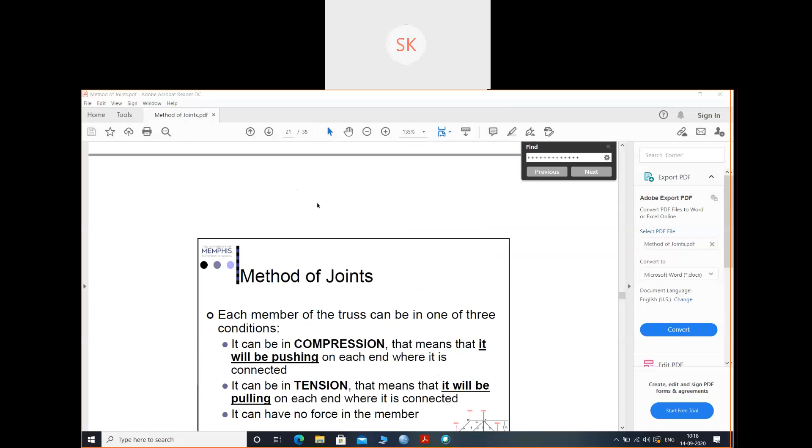Hello, alright. I hope this part is clear to you. This part is clear to you, right? This is the method of how we have found out this 500 and 700.

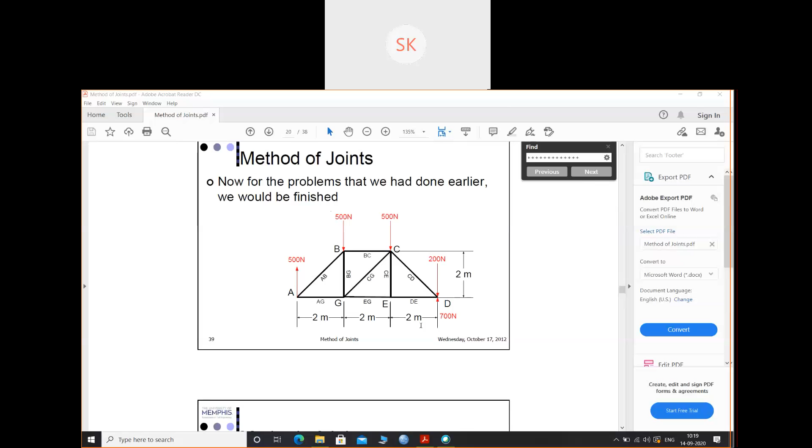Now let's move to analysis of the members. I am at screen 41, page 41. So, method of joints. Each member of the truss can be in one of three conditions.

It can be in compression, that means it will be pushing on each end where it is connected. So either your member will be in compression or it is in tension. There will be three conditions: sometimes your member will be in compression, pushing on each end where connected, or it will be in tension, pulling on each end where connected.

I have drawn a yellow line. Let me change the color. I have drawn a red line. It is visible. Please respond, a red line is visible.

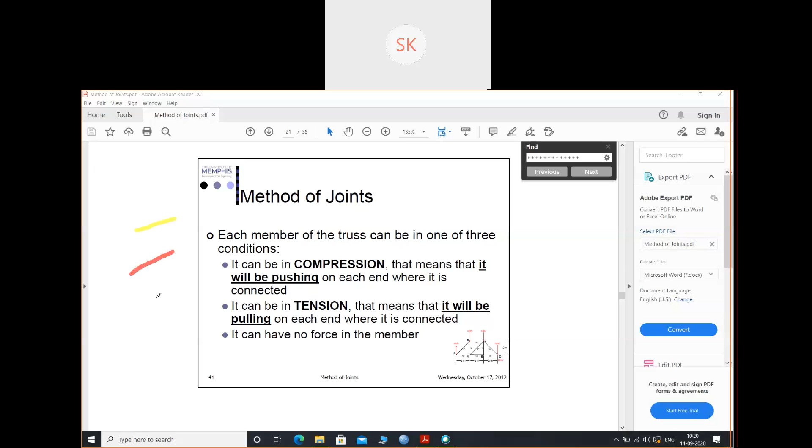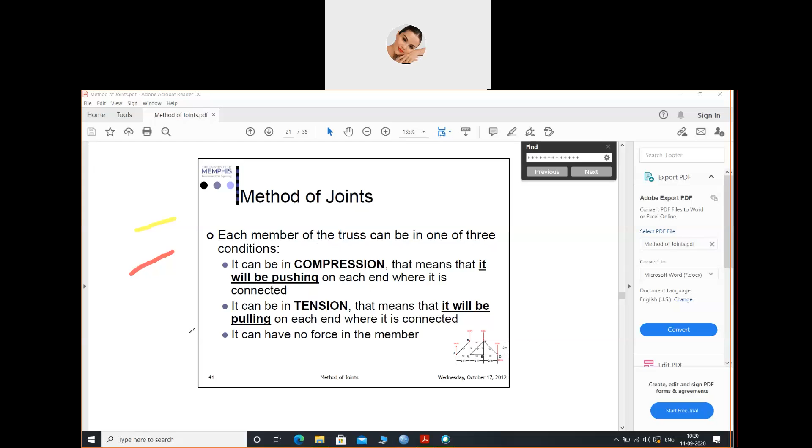This is one joint A, this is one joint B. So either this will be in tension or this will be in compression, or it can have no force in the member. Understood? So your member will be in three conditions: compression, tension, or it will have no force in the member.

In the method of joints, we are going to assume the condition, only yellow and red line is visible. Yes, I have used yellow and red. Okay.

Next, understood or not: your member either will be in compression or in tension, or it will have zero force. We have discussed zero force member earlier, right? Again, zero force member means that member will not carry any force.

So the member which does not carry any force is considered a zero force member. So you have to consider that the members are in compression or in tension, and if after solving you find a member is carrying zero force, it will be a zero force member.

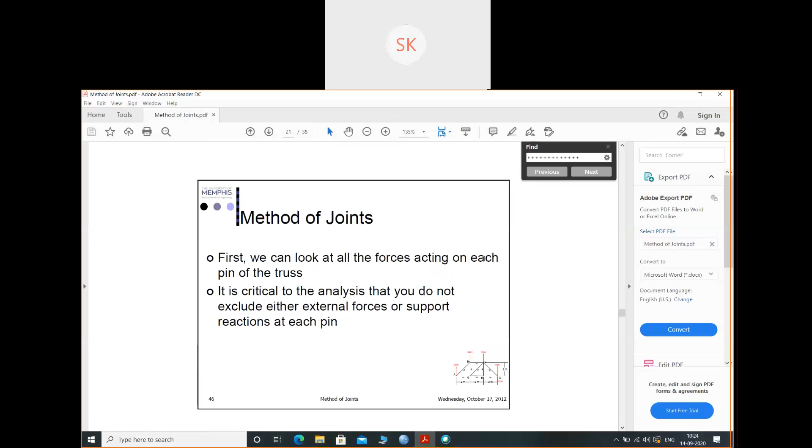First, we can look at all the forces acting on each pin of the truss, at every pin. That means at every joint A, B, C, we'll analyze what forces are acting. It is critical to the analysis that you do not exclude either external forces or support reactions at each pin. If you do not consider all the forces, then you'll get wrong answers.

If a member is pushing on a pin at one end, it is always pushing on the pin at its other end. Consider member AB: if it's pushing here, this member is in compression, so at this point it will also be in compression. It cannot happen that at one point it is in tension and at another point in compression.

Method of joints. Conversely, if a member is pulling at a point, the same logic applies.

At one important point, at any joint, you can only solve for two unknowns. Suppose the screen is visible, 49 screen. Screen is visible. Please respond. I'm at 49 screens. 41. 41. Why in 46? Wait, it will come to 49. No, it came now, ma'am.

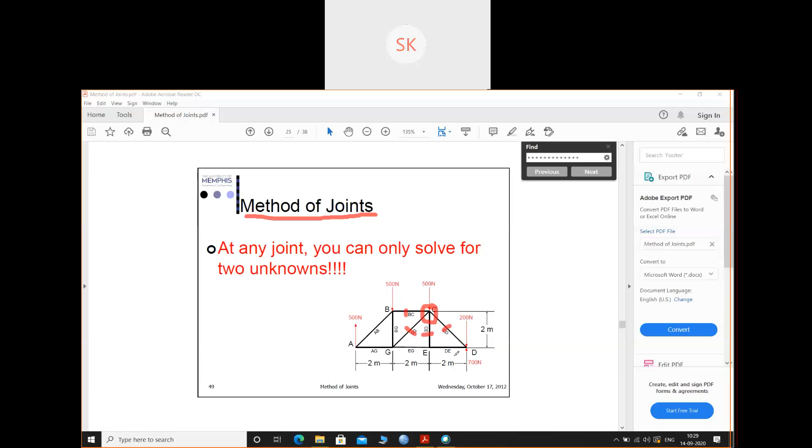Suppose take the example of joint A. At this joint, you have unknowns AB and AG. You have one known point, which is 500. So by this, you can find these two values. So joint A has two unknowns, AB and AG, and joint D has two unknowns, CD and DE. Understood? Joint A has AB and AG, and joint D has CD and DE. So you have to start with joint A or D. Once you solve for A, you will get the AB and AG values, right?

Then next move to either B or G; you will have the option of either B or G. At B, you know the AB value now, so how many unknowns do you have? BG and BC, so you can solve this. But if you go to G, here there are four members. When you solve A, you know only AG, but next you have to find three unknowns: BG, CG, and EG. So it will be difficult for you.

So while solving, you should know you have to solve for two unknowns. Got it? Now is it clear? His response: now it's clear. Please respond. Yes, ma'am. What about others?

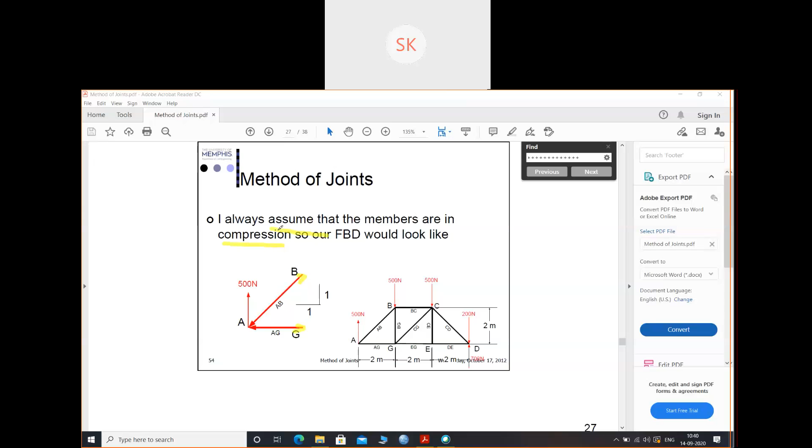Okay, I have assumed that members are in compression. So the direction of the members are towards the joint. Let me note, change the color to red.

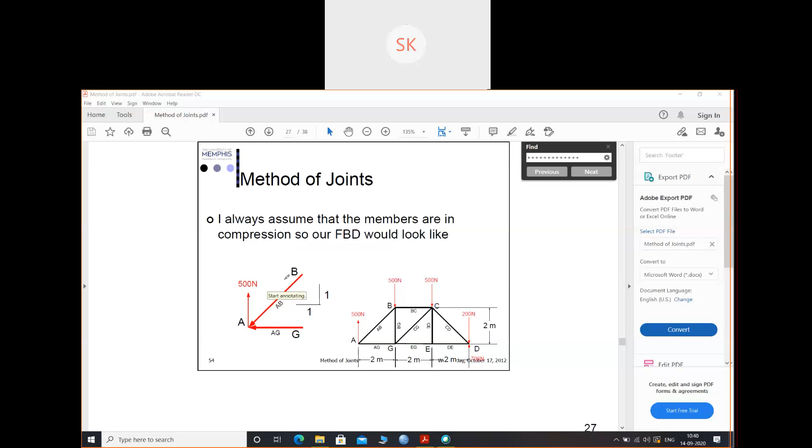So this is the free body diagram. Two forces are acting, one is AB, another is AG, and I have considered that these members are in compression. One force is already acting, which is 500. So this is the free body diagram. Now you have to analyze it.

Since I assume compression, the force in the members are pushing on the connection.

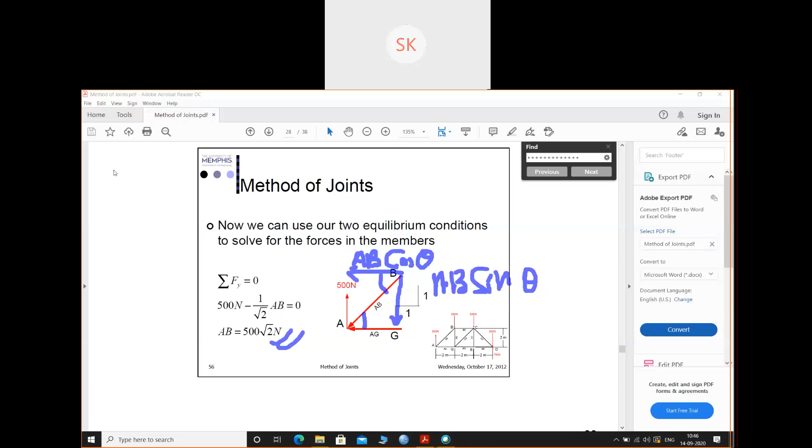See, what we have to do: we have drawn the free body diagram of joint A, and we have to resolve this. This is the inclined line, and the angle is given to you as 1 by 1, that means your slope is tan theta equals 1, so theta is 45 degrees. So this angle is 45 degrees.

That means this line is 45 degrees to the horizontal. Now you have to resolve the AB part. This is 45 degrees, and if you take the adjacent angle, this will also be 45 degrees. You should know that where theta relies on the base, that will always be cos theta, so this will be AB cos 45 degrees. And the vertical part will always be sin theta, so this will be AB sin 45 degrees.

Now you have to resolve all the vertical forces equal to 0. If you see this diagram, what are the vertical forces? One is 500, and I have taken the upward direction as positive, so positive 500. I am taking the downward direction as negative. This AB sin 45 degrees is in downward direction, so I have taken it minus. AB sin 45 degrees is AB times 1 by root 2.

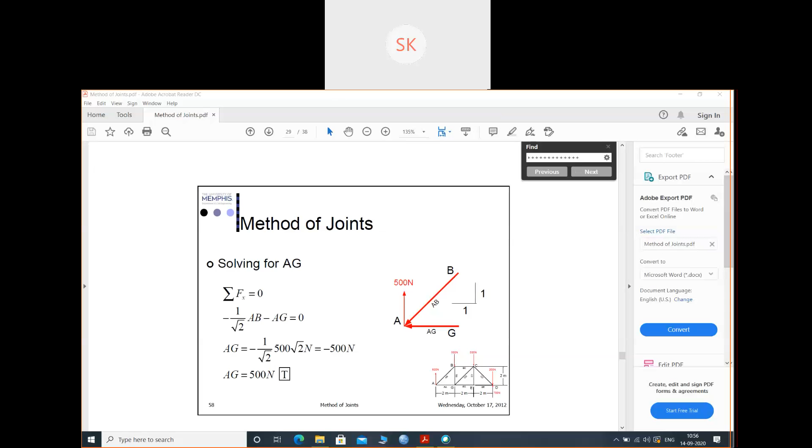Roll number 7, 30, 47, 19. What happened? Not replying. Understood or not? Am I audible? Roll number 29, am I audible? Okay. Then have, okay, okay.

So we have to see, we have found out AB and AG. Then we can move to which point? We can analyze point B and point G. But when you see point B, you have two unknowns, BG and BC. You know AB value, you have only two unknowns, BG and BC. But if you move to G point, you have three unknowns: BG, CG, EG. So you won't be able to analyze this G point. So we will move to point B, because two members are unknown, but one member you know.

Okay. In these slides, they have discussed that we can move to B.